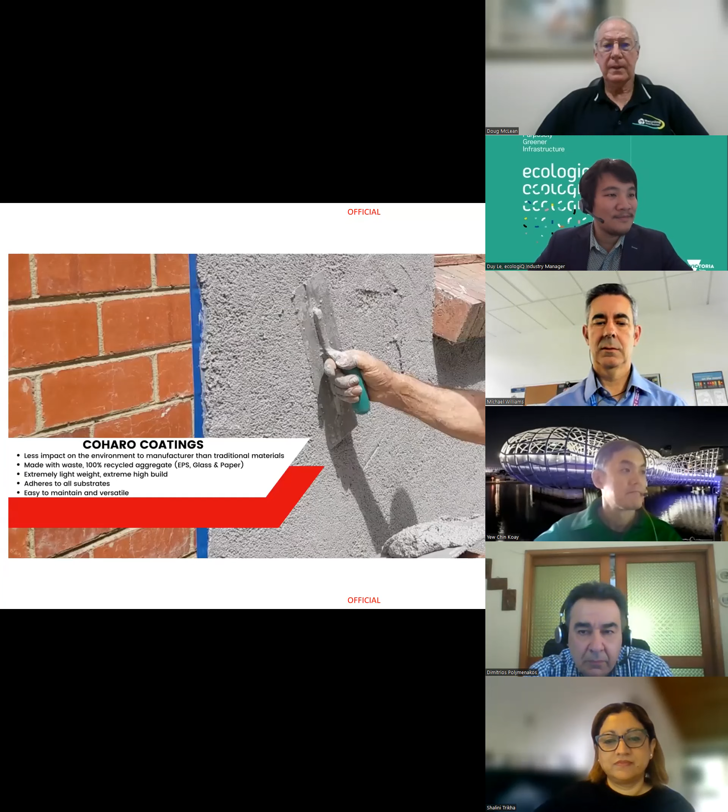And options like Coharo, a business that provides a 100% waste-derived leveling coat, which can help smooth out shotcrete, fill gaps and cracks inside masonry bricks. It's made from polystyrene, glass, and paper. It meets Australian building standards, and the same material is used to make a masonry block alternative.

Sometimes the most simple innovations are best. DuraPanel Ortec makes compressed straw panels for soundproofing in sports stadiums and music stadiums. It's being used at sound studios at the Docklands, and it's been used at the Sydney Olympic Games. This is a great product that's available, also made right here in Victoria.

Last but not least, last month we had this great new innovation - carbon black recovered through end-of-life tires. This is a lime replacement in asphalt. They believe it will improve performance, extend the life, and act like a sunscreen for the roads. As part of the manufacturing, they also produce a tire-derived fuel oil, which is a diesel replacement. This is a Queensland company looking to set up shop here in Victoria, and we'll be looking for sites to trial this on Victorian roads.

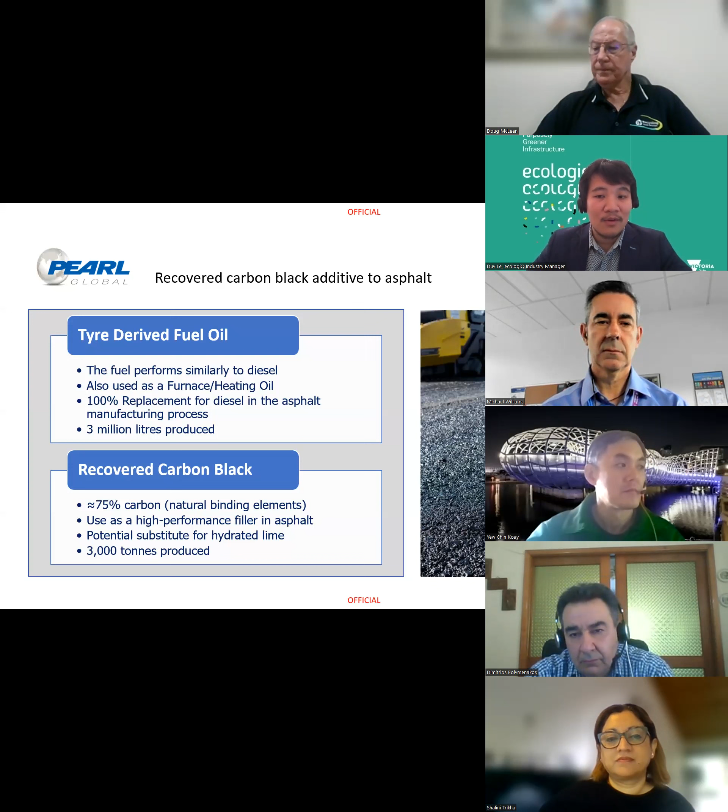But we're here today to talk about what's possible in concrete with recycled materials. I've got a couple of slides lifted from our visual guides, which if you haven't seen before, you should jump onto the ecologiQ Knowledge Hub and look them up. We know that when it comes to structural concrete, you can use supplementary cementitious materials in your concrete.

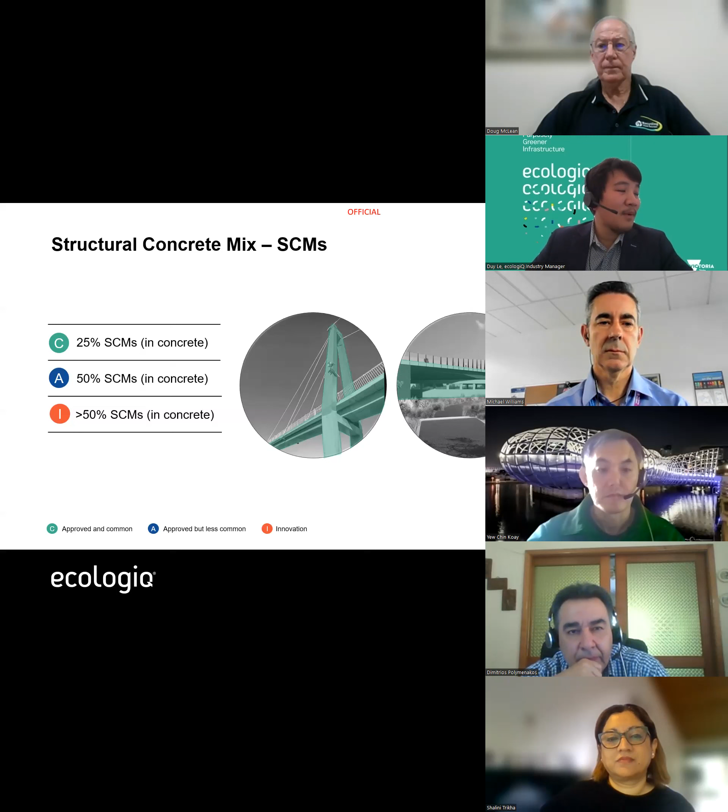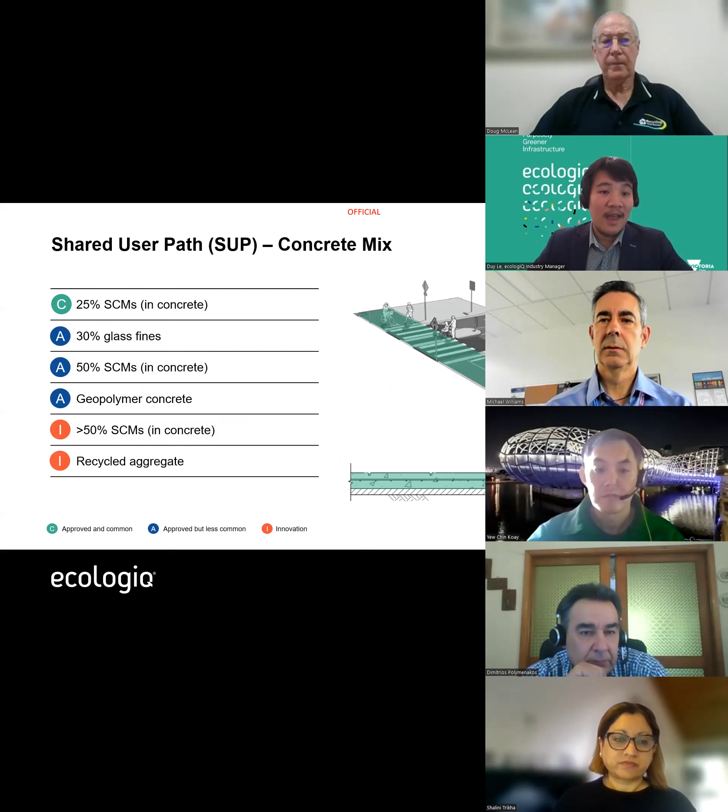But we know we can also push the boundaries around that, going beyond 50%. We know that in non-structural applications like shared user paths, you can start using these SCMs, but you've also got options around geopolymer. As we go through today, we'll look at what kind of different aggregates might be possible in terms of the innovative front.

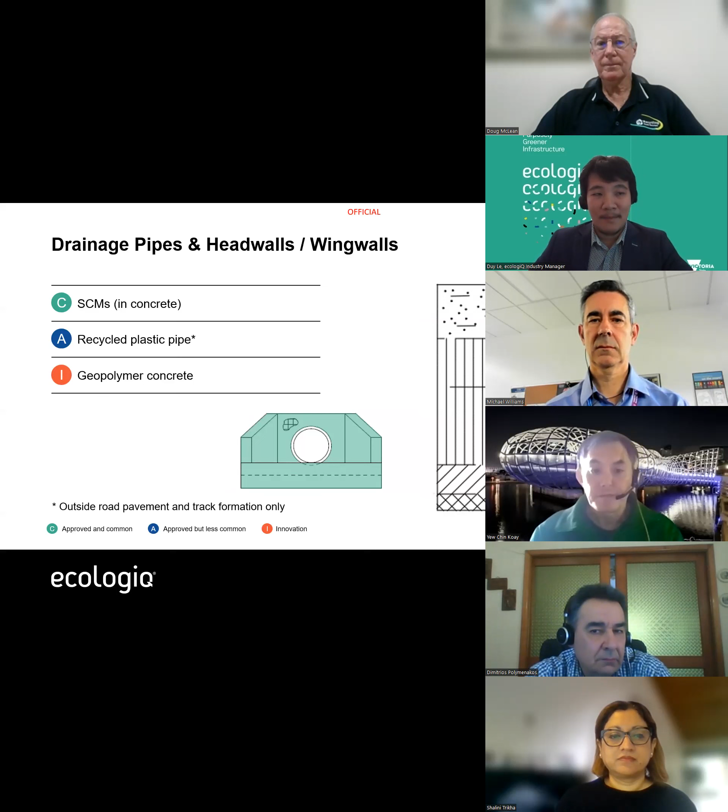You can use things like plastic fiber replacing steel. You can use crushed brick and rock, and it can go into other applications like medians and curbs, as well as drainage pits and lids, which you'll see today. And head walls and wing walls, again with geopolymer concrete right through to plastic applications. So you'll see a theme of today - there's going to be a lot of talk about the alternative aggregates that can go into these sorts of structures.

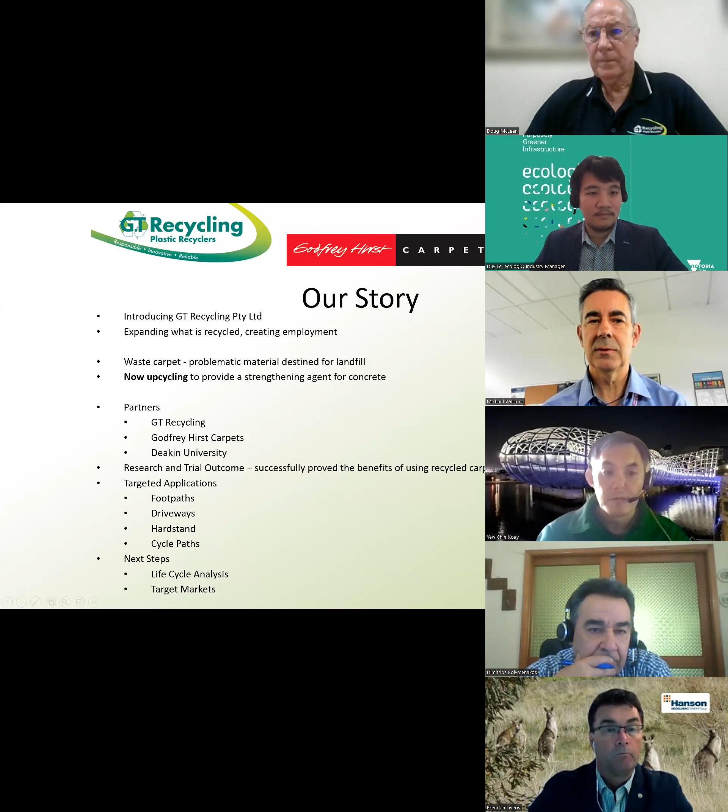The fibre product we're talking about today is the result of a three-way collaboration. Godfrey Hirst is a well-known carpet manufacturer, actually the largest designer, manufacturer and exporter of carpets in Australia. In 2017, they had a turnover of about $430 million.

The company is now owned by Mohawk Industries in the USA, but continues to run very efficiently and happily in Geelong and other sites in Victoria. Our other partner, Deakin University, is world-renowned for their expertise in fibre technology, especially located in their Institute for Frontier Materials at Waurn Ponds and in the School of Engineering.

So on the next slide, I'll pass to Doug for a bit of an overview and some background on GT Recycling.

Thanks, Mike. I'll take the opportunity to give you a brief snapshot of what our company GT Recycling is all about, and a little bit of the evolution of this particular project and the resultant product. GT Recycling is a plastic recycler, mainly concentrating in polyolefins, based in Geelong.

The business has been operating for about 20 odd years, and it's not so much in the collection and recycling of curbside post-consumer waste. It's more in the area of industrial and commercial, and we do a lot of work recovering waste plastic from councils, from tips, and also collection points that councils have around the state.

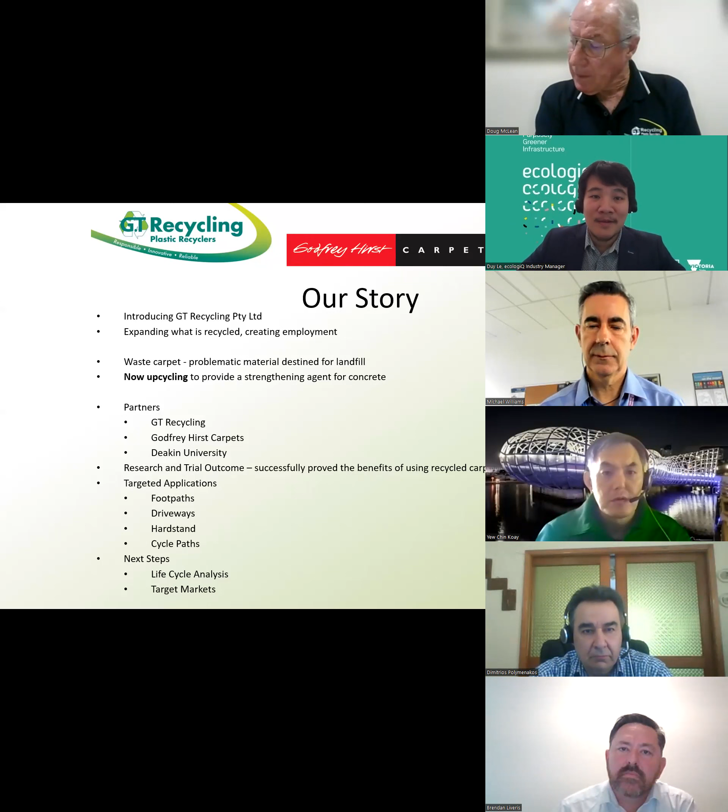So okay, well I'll pass it over to Mike. I think that's enough, and Mike will give you a bit of technical detail on the product and a few more details.

They're not obvious, but they do have obvious characteristics. And the whole point is that concreters want a concrete that is still workable, and still going to provide the surface finish that they're after.

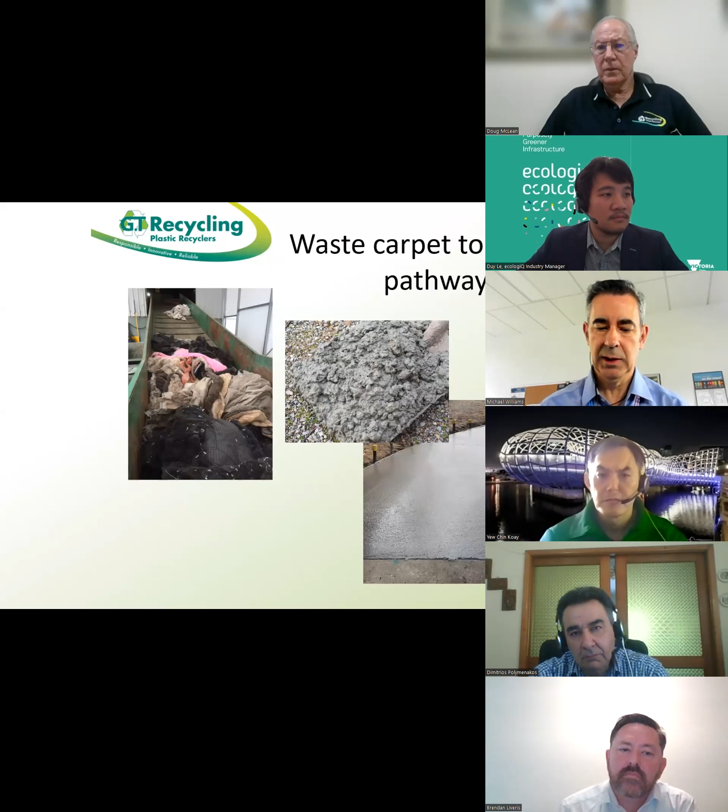So these are two key areas that we've actually been very successful in. We're expecting that in terms of capacity, there's about at least 150 tonnes of this carpet waste per year as potential to be used.

So in lab testing with Deakin across a number of years, you can see the example of a standard concrete sample block without the fibres, and then the same stresses applied to a sample with the fibrecrete included. There is a significant advantage to the product in preventing cracking at the start, but also reducing the propagation of cracks within concrete over time.

We've complied with all of these different standards, both American and Australian, referenced by Deakin as they tested and formulated the exact benefit mix of fibres that we need. It's mentioned there that we've reached compressive strength of 25 megapascals, and actually on the most recent trial site at Godfrey Hirst, we were certified to 32 megapascals. So it's certainly been proven recently to be up to industry standards.

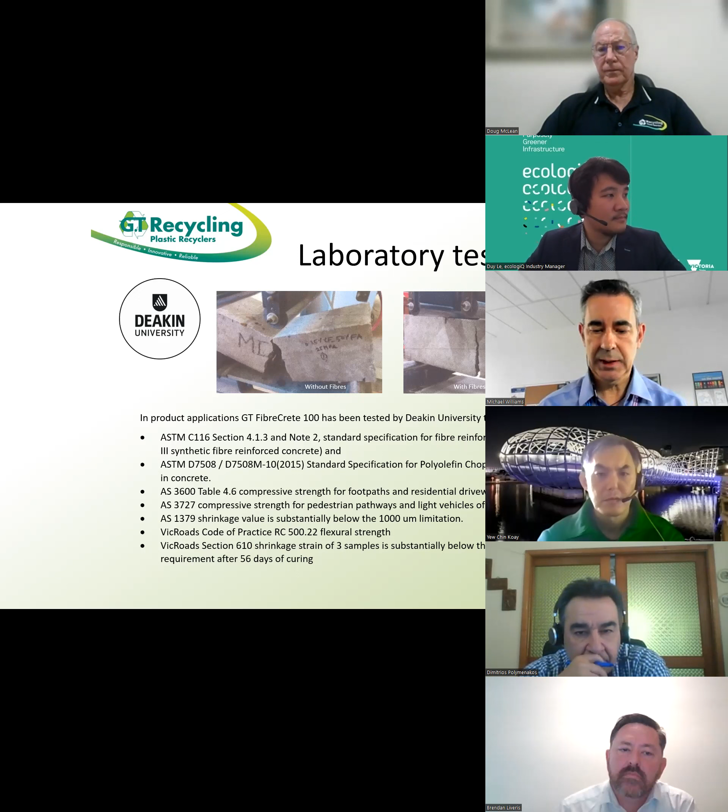So just to quickly work through the product life cycle summary: at the start, we use minimal energy to process the carpet offcuts into the fibres. The concrete projects can specify the GT Fibrecrete 100 for added durability. Through production, there's no additional energy use over regular concrete, and no additional processes. Through distribution, we're using standard concrete trucks to mix and deliver the concrete to site.

Importantly, for usage and repair, our concreters have reported that it was no trouble for them to work with this product added into concrete. And over time, it's proven to be more durable and require less repair.

At GT Recycling site in Moolap, there's been a slab laid for a number of years, and it's very obvious to see this slab next to another slab that's run over by forklifts every day. The fibre reinforced concrete is obviously very much together, with no cracks like the regular piece of concrete beside it. And once concrete is decommissioned, it can be further recycled - we're happy to suggest, at this stage it's only a suggestion, that perhaps it could be used as aggregate or road base.

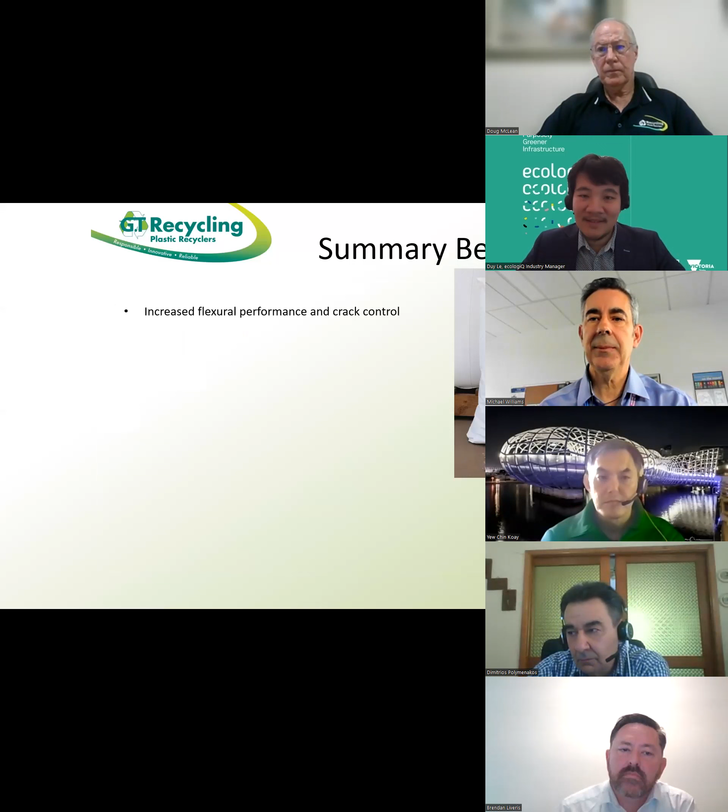Once again, increased performance and crack control. We've reduced drying shrinkage as well with this product, with all the workability and advantages of that, and it's very cost effective compared to virgin plastic fibres. This is a very high value, low cost but high value product.

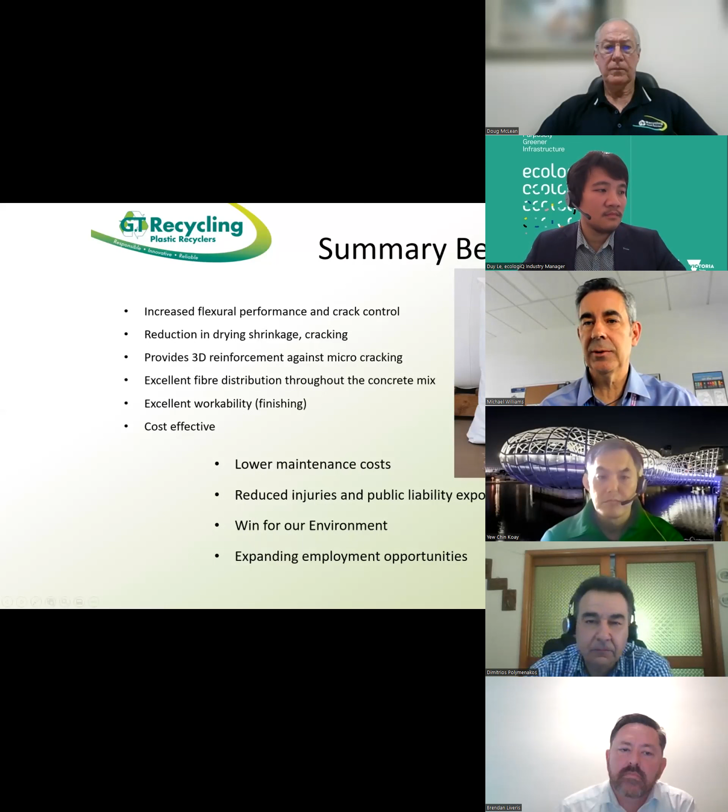And we were expecting that it would result in reduced injuries and public liability exposure for LGAs. It's a win for the environment, and it's expanding employment opportunities with a new product.

Next steps, we're looking at a full life cycle analysis, which we'll kick off in the new year. We're working on finalising the packaging, marketing, and gaining market acceptance through LGAs around our area. We would like assistance from anyone at ecologiQ or on the call with additional trial sites, and particularly to work with a concrete supplier that has operations in Geelong as a partner.

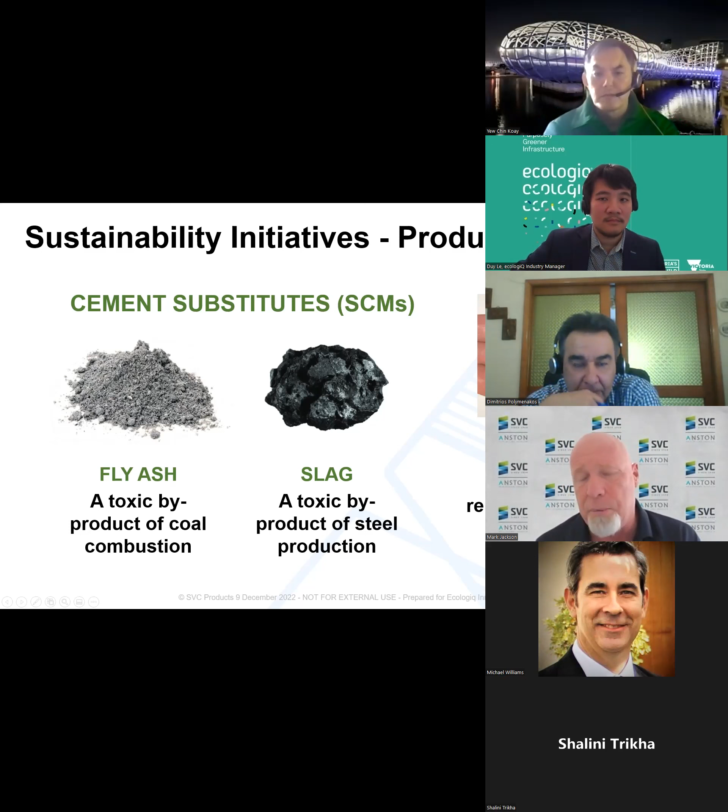We still use conventional steel reinforcement, but we've started adding recycled e-mesh and recycled plastic macro-synthetic fibre. We've found this improves early stripping or demolding of product, and has assisted with handling of the green product, reducing cracking and spalling. Talking to the boys in production this week, our current mix design has basically eliminated all cracking and spalling. We still lose a few products to human error - that's to be expected, I guess. But an unintended consequence of developing this new eco blend of concrete is that we're actually making better and stronger products.

When we talk about the ready mix or pre-mixed concrete we buy in, we're currently sourcing that from Holcim, and that goes into all our precast pit production - the Vic Roads custom pits, DOT custom pits, subdivision pits, and our commercial knockout range. We use three different types of ready mix from Holcim at the moment: EcoPact, Ultraflow, and Agilia. You can look that up on their website, but they're basically all concretes with varying levels of SCMs involved.

Currently all our small elements for municipal and other areas are made with our eco concrete. We're getting great results - we've reduced a lot of the chipping and spalling that were sometimes common, especially in colder weather, which is difficult for any precasters making stuff in Melbourne in the middle of winter. That's where we have our challenges.

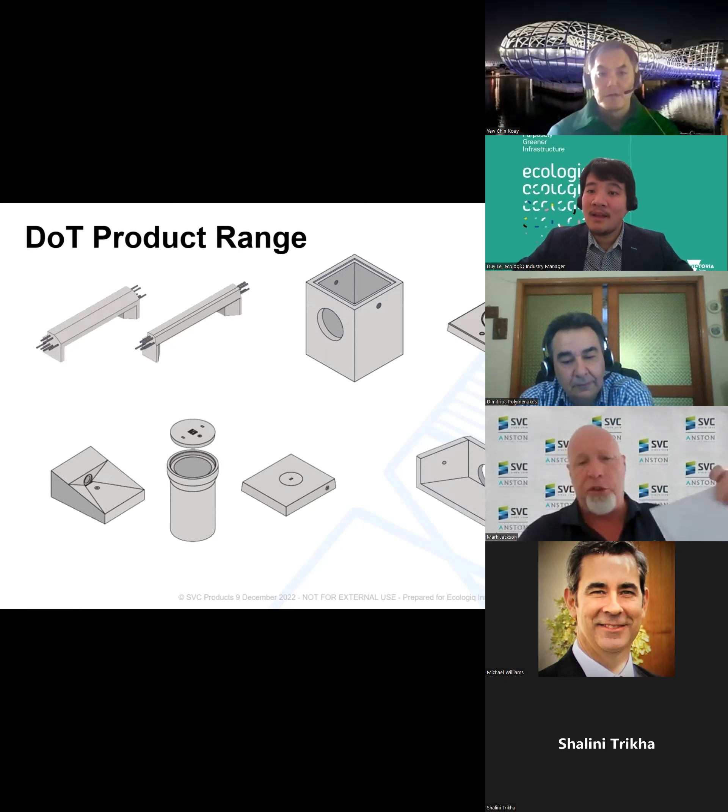I'm moving through this very quickly - I'm very pleased with this. If we move on to the next slide, please.

Great, I see you've got about 3 minutes, Mark. Yeah, no, this is the last one I want to speak about, so that's fine.

Traditionally, through the specifications of the Department of Transport, or Vic Roads as it was in the early days, we've been involved with the Department of Transport going back to the days of the CRB, the Country Roads Board, the Road Construction Authority, Vic Roads. In 1992, the standards changed and the concrete covers changed for all pits in the stormwater for Vic Roads, and that was a concrete cover with a circular insert. The problem was it was always a very heavy product for the insert for maintenance crews.

In the last couple of years, we've seen a transition over to lightweight load class C, SMC lightweight plastic products. Unfortunately, these particular products are a fully imported product - there is no Australian content whatsoever in these products.

So what we've developed now is a SVC Eco Concrete frame. This has been worked very diligently over the last 12 months to produce a product now that is a concrete section 125mm thick, that is load class C, so that's 150 kilonewton. And we've included an SMC insert. Now, the SMC insert is the lightest available for maintenance crews - this is 1/3 the weight of the traditional concrete cover, and about 2/3 the weight of the current offerings of the load class C fully imported products.

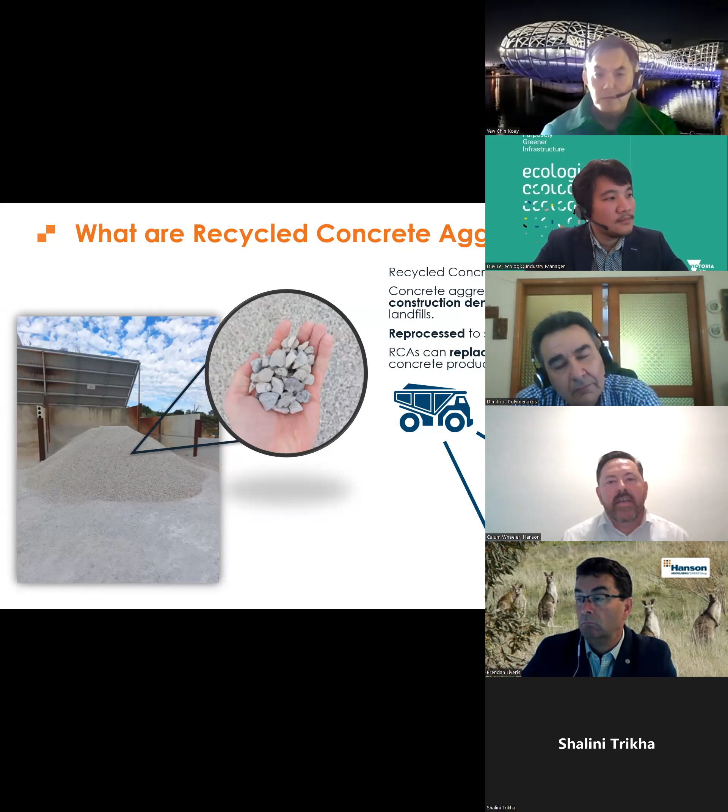Looking at the RCA properties: just like traditional virgin materials, the product's available in a 20 mil and 14 mil graded aggregate. Unlike traditional aggregates, the water absorption is quite a bit higher, sitting at around 5.5 to 6%. The shape of the material itself is comparable to virgin materials, and it's able to meet the minimum requirements for AS 2758. That's the raw material.

What about when we put it into the ready mixed concrete itself? What we found when we started doing the trials is that it can shorten its open life or its plastic properties. At heightened replacement levels, it will lower the bleed properties of the mixers, and also likely increase the variability of strength results. Also at higher replacement levels, we saw an impact on shrinkage results and ultimately some reductions in compressive strengths by pushing those replacement levels so high.

What we found is that we recommend it is a usable product, but it does have some limitations. We think it should be around the 32 MPa and below. There's plenty of applications this product can be used in. When we've taken it out to the field, we've looked at replacement levels between 10 and 100% of the coarse aggregates, and what we've found is the optimal replacement levels sit between around 30 and 50%, to mitigate or eliminate additional cement offsets. That's why we've come up with those.

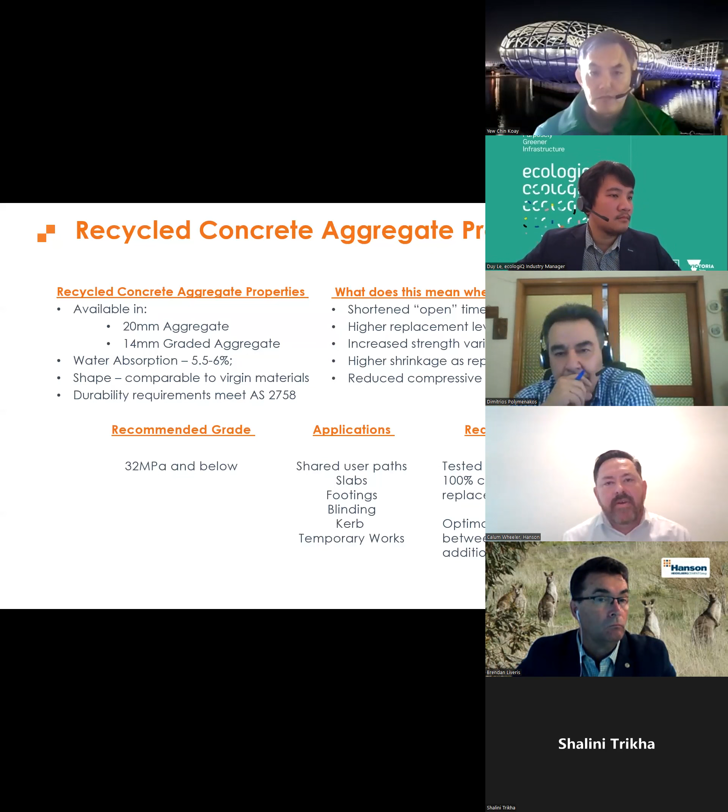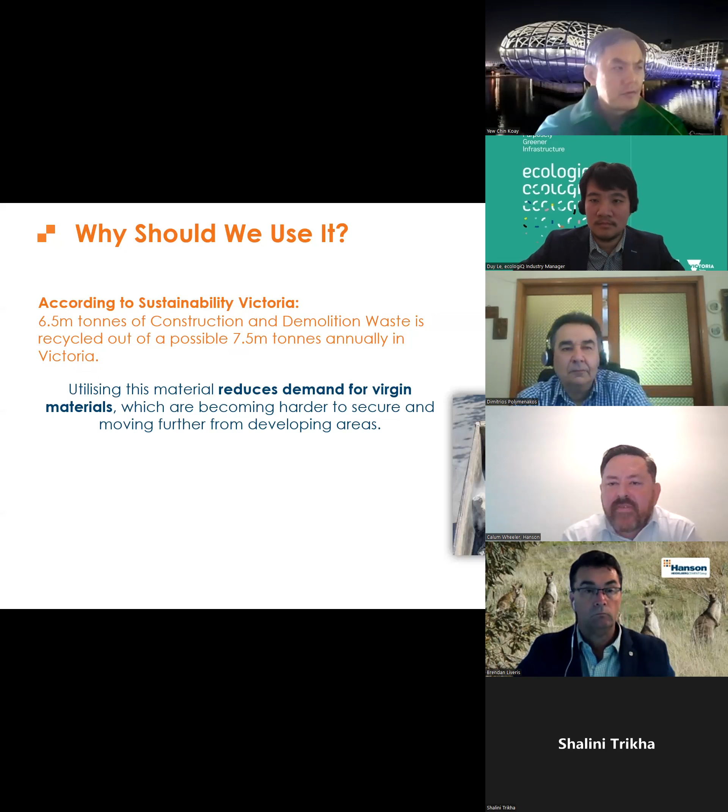So why should we use RCA in concrete production? According to Sustainability Victoria, we've got availability of 6.5 million tonnes of construction and demolition waste within the Victorian market out of a possible 7.5 million tonnes annually available to us. By utilising this material, we're reducing our demand on virgin materials. These virgin reserves are depleting, becoming harder to secure, and moving further from the developing areas. Each year we utilise large volumes of virgin materials, and to replace them we have to move out further and further from the developing markets.

So where should we use this? Of the estimated 50 million tonnes of quarry products used each year throughout Melbourne, we only have access to about 5 million tonnes. So whilst there may be 7.5 million tonnes of demolition available to us, by the time we reprocess and clean up the material, that equates to about 5 million tonnes, roughly 10%. So recycled concrete aggregate is not a replacement, it's a supporting function. We need to target its use to ensure we're using it in the most sustainable manner. Currently we utilise crushed concrete mainly in road base, fills and under slabs. By progressing it into a recycled concrete aggregate for concrete production, we're looking at expanding its usage into foot paths, curbs, footings, blindings, temporary works, those types of applications.

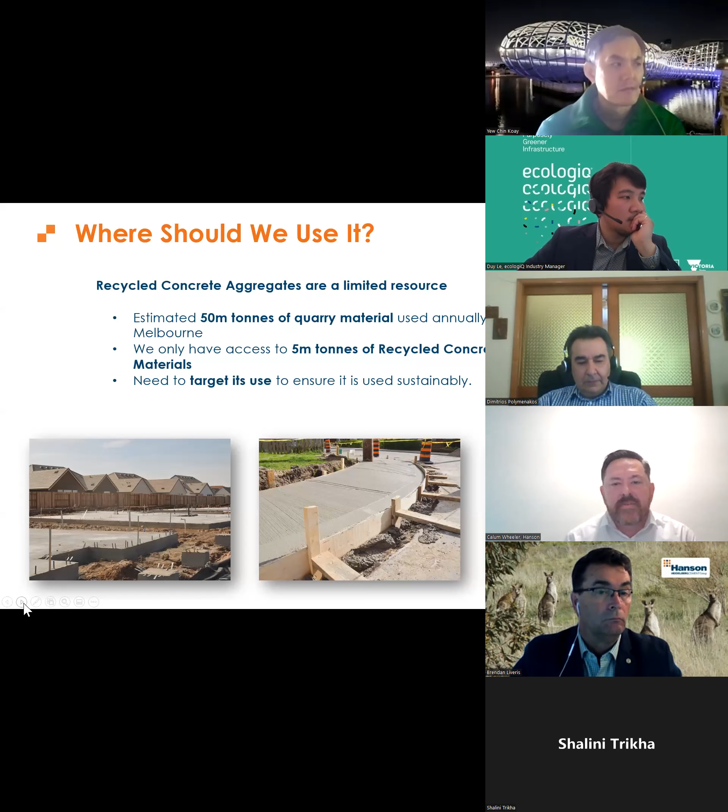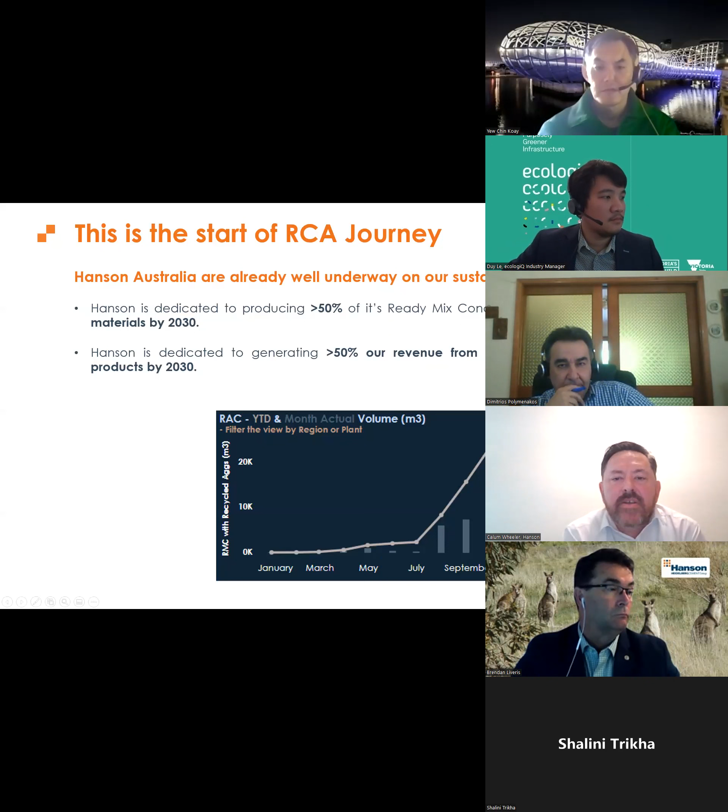While the RCA journey may just be beginning, Hanson Australia is well underway on our sustainability journey. We're dedicated to producing at least 50% of our ready-mix products portfolio using a minimum 30% circular materials, which this falls into. We're also dedicated to transforming our portfolio so that we're generating at least 50% of our revenue through low carbon and circular products by 2030 as well. You can see by the graph there, the uptake and usage of these types of products is significantly increasing month on month.

And finally, so in summary, RCAs are a really valuable addition to virgin coarse aggregates, not a replacement, an addition. RCAs are a limited resource with limited availability in the Melbourne market, so we need to be selective about how we use this product to ensure we're using it in the most sustainable manner. The use of RCA aids in creating that circular economy we're striving towards and minimises waste. Hanson is dedicated to producing over 50% of its ready-mix concrete using a minimum of 30% circular materials, such as this, by 2030.

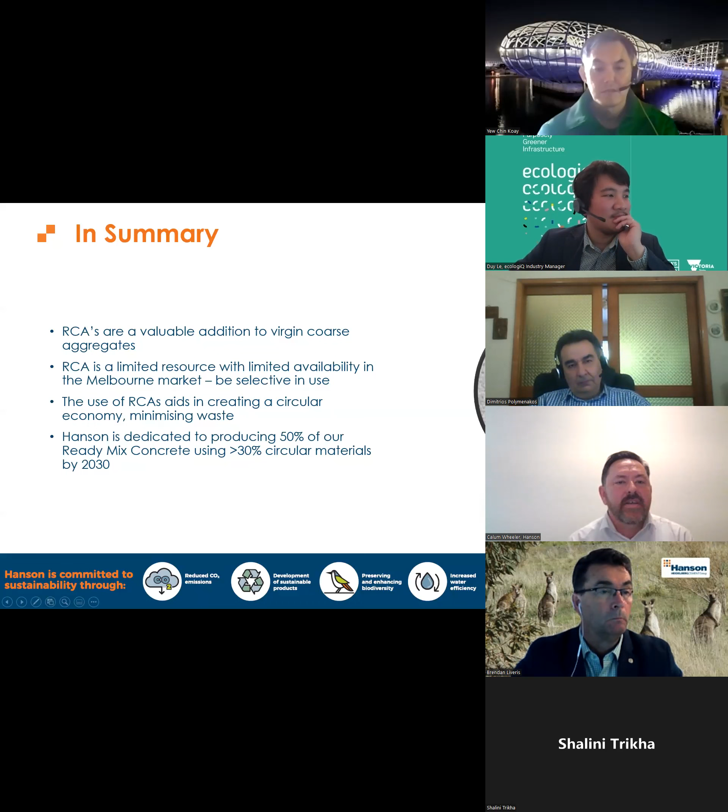So I know that was a very high-level presentation on RCAs, but hopefully that has given you an oversight of recycled concrete aggregates in the production of ready-mix concrete. Thank you.

Thanks, Calum, for your presentation. Very interesting, I always favor recycle, reuse in infrastructure. The question for you: for this reconstruction material, how do you control the quality?

Yes, so we apply specifications. We're fortunate that VicRoads have set out some specifications around grading specifications, contaminant content measurements. We utilise on-site laboratories within our production facilities to carry out production-based testing on the raw materials that come in, and on the production of those products, very similarly to the production quality assurance programs applied to virgin materials.

Yeah, I understand that a number of the requirements cannot be met. For example, like VPV, normally recycled material, the VPV is higher than required in the virgin specification, like tensile strength and chemical content. How do you overcome this type of thing?

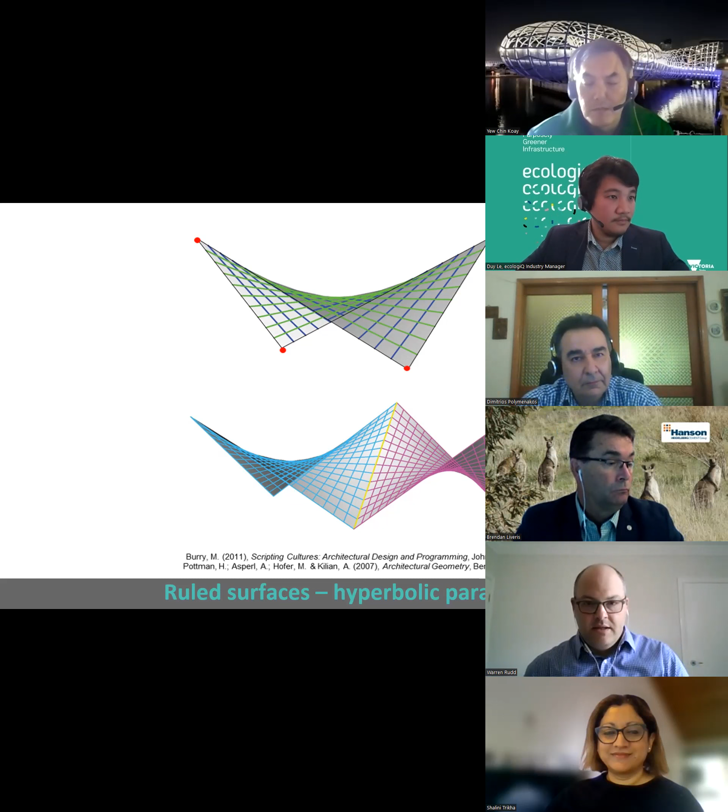So this was just a slide. This type of geometry isn't new. It has been used before successfully in architectural projects. It was very popular with architects like Felix Candela and Antoni Gaudi.

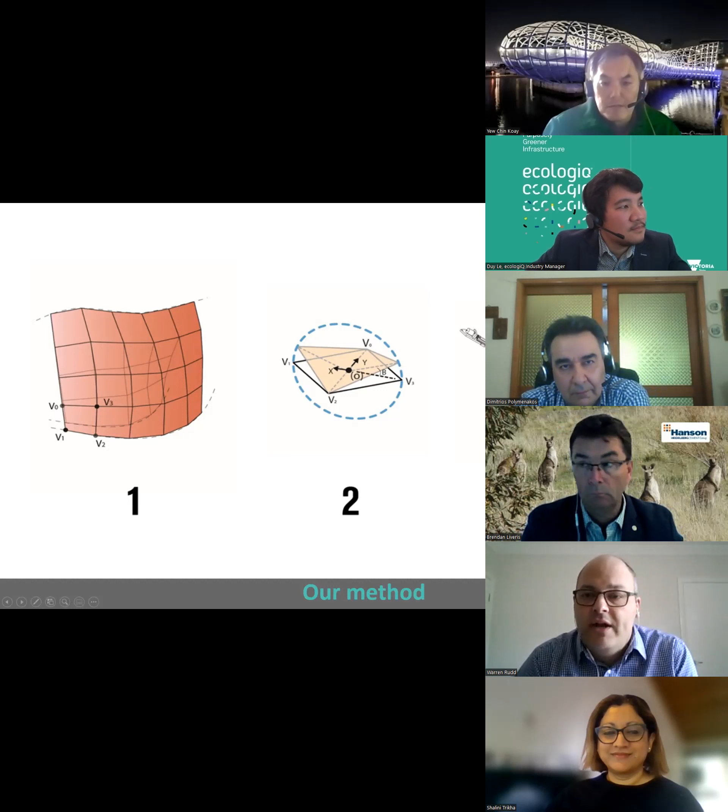And how this, in practice, how this really works with us is we've developed a technology that can take a curved design or a free-form design, and it panelizes it or divides it up into a series of panels. The technology then extracts the geometric coordinates of each of those panels, and it feeds it into our mold. We then cast that panel. Once it's cured, we demould it, take it off the panel, and then we repeat that process without creating any formwork waste.

So that's kind of, that was really around the formwork, and then just talking about our low carbon concrete alternative. What we use is a geopolymer. We've created our panels using a geopolymer. We have developed it in-house. We do not use any Portland cement in our mix. It's fly ash and slag, and then we use an alkali activator. And that really gives us properties that are pretty similar to traditional Portland cement for the applications that we're looking at. But the real benefit is it's up to an 80% reduction in CO2. We're using it, and it has a positive waste footprint.

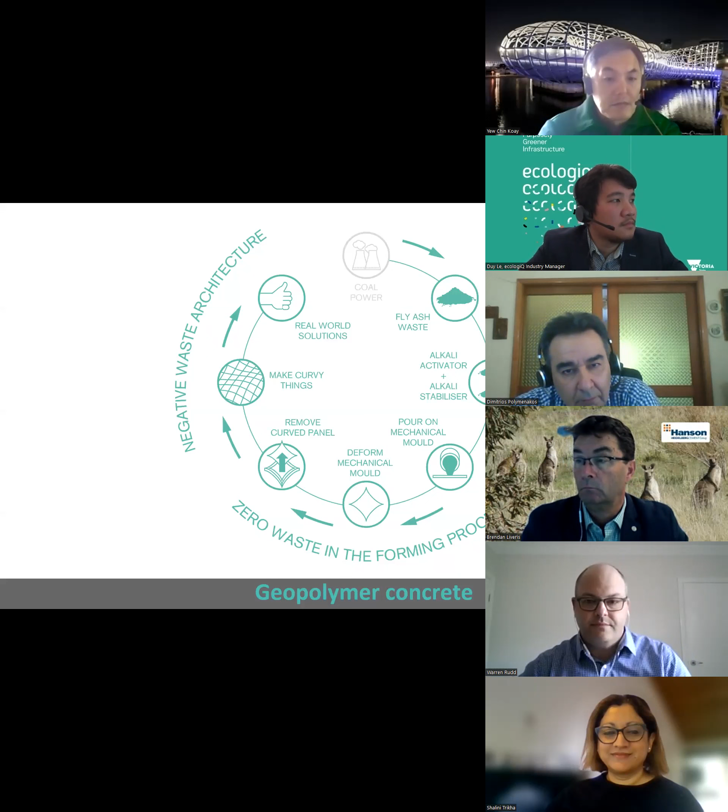In terms of some of the challenges that we faced, particularly around design, there are lots of interrelationships between the various stakeholders, which I'm sure everyone on this call will be familiar with. Typically what happens for us is a property developer will come up with an idea and they want to build something that's pretty unique. And they'll then engage an architect who tries to capture that original design intent.

But from then on, it gets a little bit trickier because each of the subsequent stakeholders try to value manage that project based on their own priorities. So the engineers are very, and rightly, focused on risk. The builders are looking at cost and buildability, and the precasters are looking at the capabilities of manufacturing these very bespoke panels.

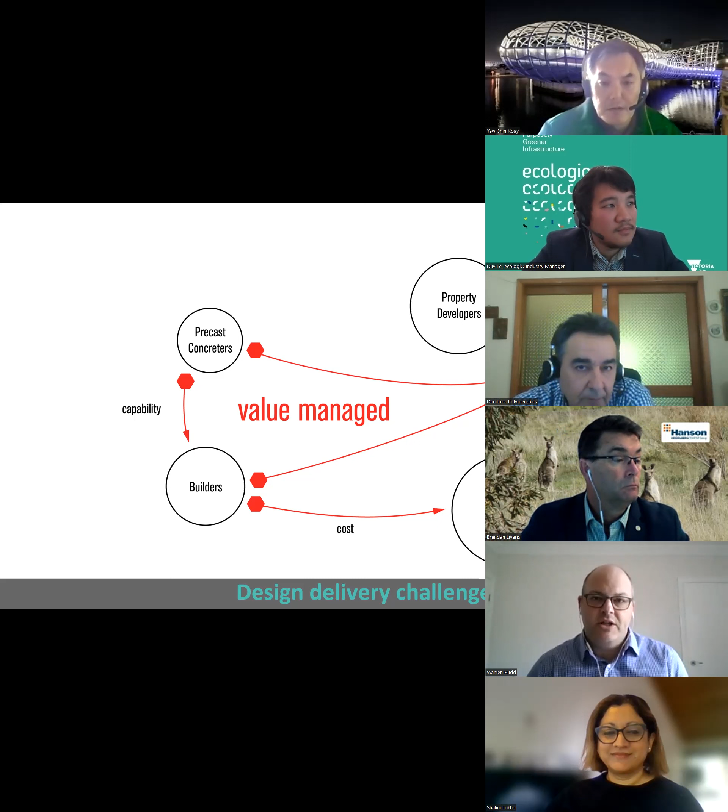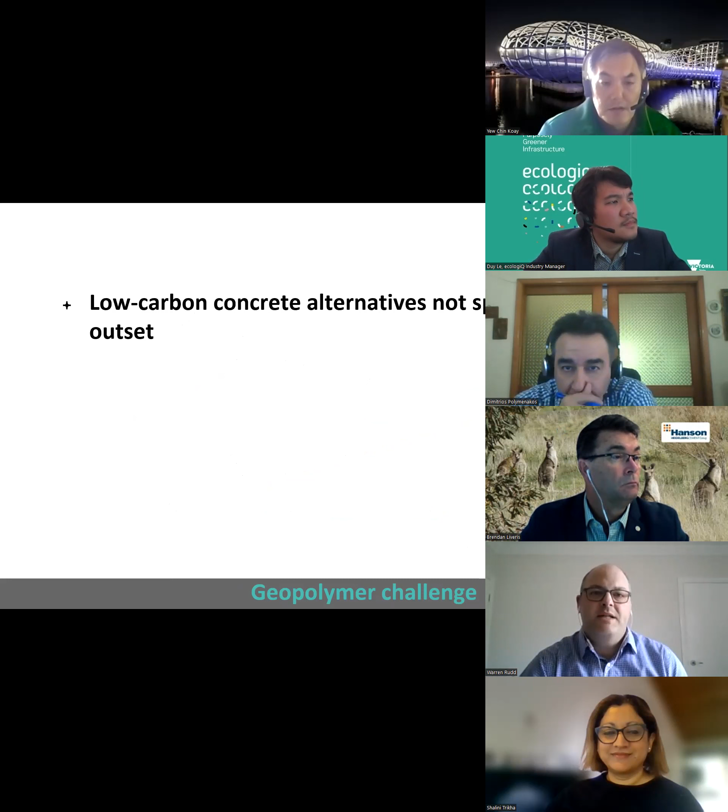And then in terms of the geopolymer mix challenges, these are some of the common themes that we've encountered. First up, concrete alternatives not being specified within project documentation from the outset. When we start talking to people later on, once the project started rolling, it's very difficult to then impact that material usage. Another one is there is a lack of industry experience using high content geopolymers. The industry tends to want to stick with what it knows and is comfortable with what it's used in previous projects.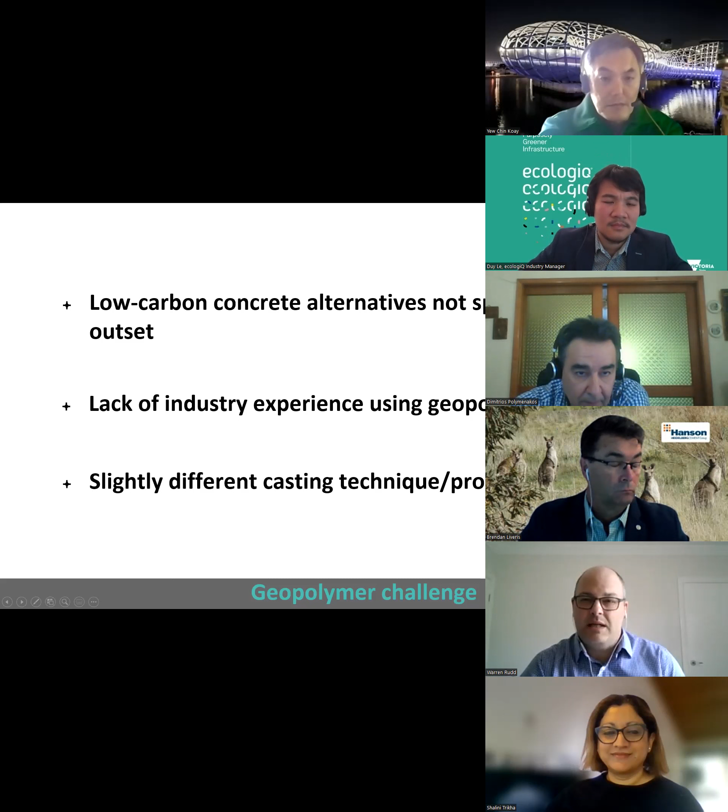And then the third one is, there are some slight nuances to using geopolymers. So there might be a slight change, people might not be 100% used to working with alkali activators, for example, or there are some slight differences in the curing or casting processes. But the good news is that it's totally achievable.

So we've actually just completed our first demonstrator project, and that is about a 35 panel curved staircase and emergency exit tower that is on a 15-story apartment building in the Melbourne CBD. It starts off on level 14, goes through the roof slab, and finishes on level 15. Each of those panels are individually curved concrete panels that we made using one of our molds, so we generated no formwork waste, and each of those panels is a geopolymer panel.

Some of the highlights from this project were, we achieved a pretty intricate design. When we first tabled it, people were kind of scratching their heads to work out how it was actually possible, but we achieved it - a pretty intricate design.

We eliminated all the formwork waste, 100% reduction in the formwork waste in the casting process. We achieved an 80% reduction in the CO2 emissions using our geopolymer mix compared to a standard Portland cement mix. We were able to achieve a 13% reduction in the steel usage - you can see those ribs, we were part of the design. We achieved a non-combustibility certification on the panels, and we achieved an engineering compliance and sign-off.

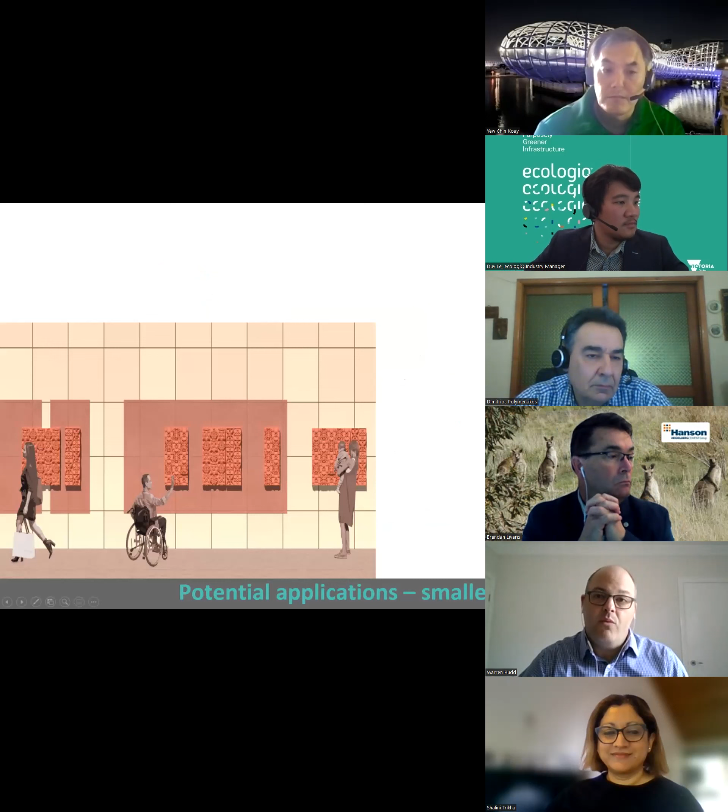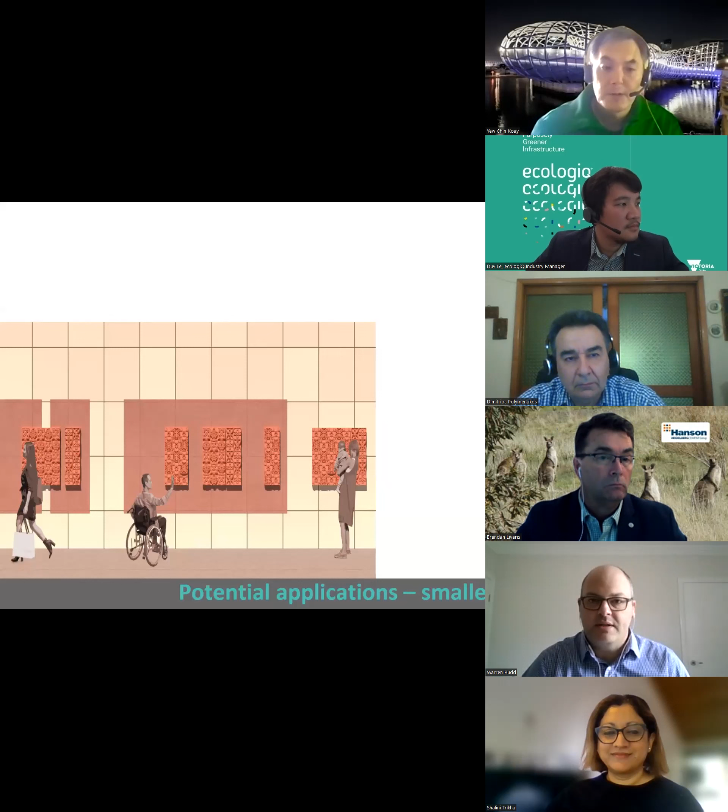We think there's a number of applications for this type of technology. On the smaller scale, it can be used for things like public installations, sculptural elements, and landscape design. That's all on the smaller scale.

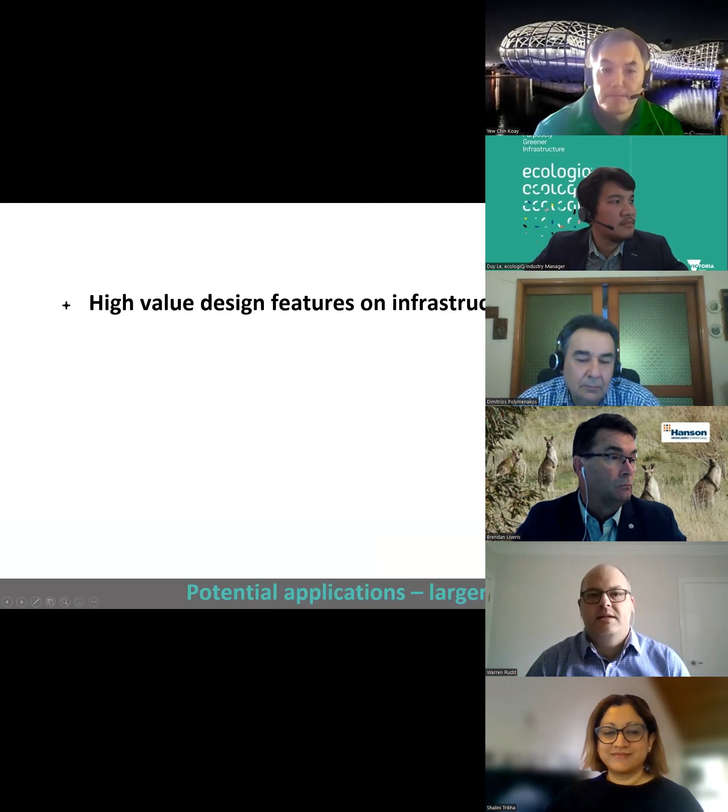But on the much larger scale, which is where we're very excited and think our technology can have a much bigger impact, is on high value design features on infrastructure projects - things like cladding on train stations, bridges, substations, etc., shade structures for public areas, and noise barriers.

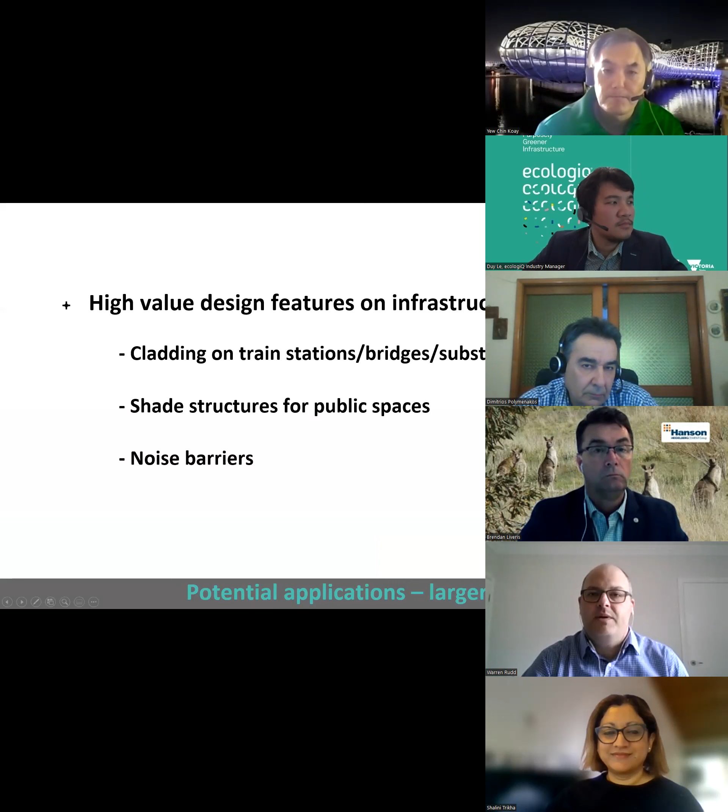The final thing we're looking for is opportunities to trial our panels on your projects. We would love to be involved as early on as possible, especially around the design phase, because there's a lot of value we can bring around the shaping of our panels and some of the benefits that could help.

We're looking to work with companies that are supportive of using low carbon concrete alternatives like geopolymers. And we're happy to work with you on smaller scale projects first, if that's a quicker pathway for us to start a relationship with yourselves. Yeah, that's it. Thank you.

Thank you, Warren. Let's open it up. Perhaps Shalini, did you want to kick off? Yeah, thanks, Warren, really good presentation.

Just wondering, have you done any LCAs? Have any LCAs or anything of the likes been conducted for this technology? Sorry, you broke up there, what was that? Any LCAs? LCAs, as in life cycle analysis?

Ah, sorry, yeah, so we have - I don't have it with me, but unfortunately Daniel, who's a technical co-founder, wasn't able to join the call. Look, it's very similar to traditional Portland cement applications, and there's no reason why we can't hit 50 years or even higher. So just to point out, what we've started with here is non-structural, and that's really how we think we can get into the market and start getting our panels used, but the technology is totally applicable to structural as well.

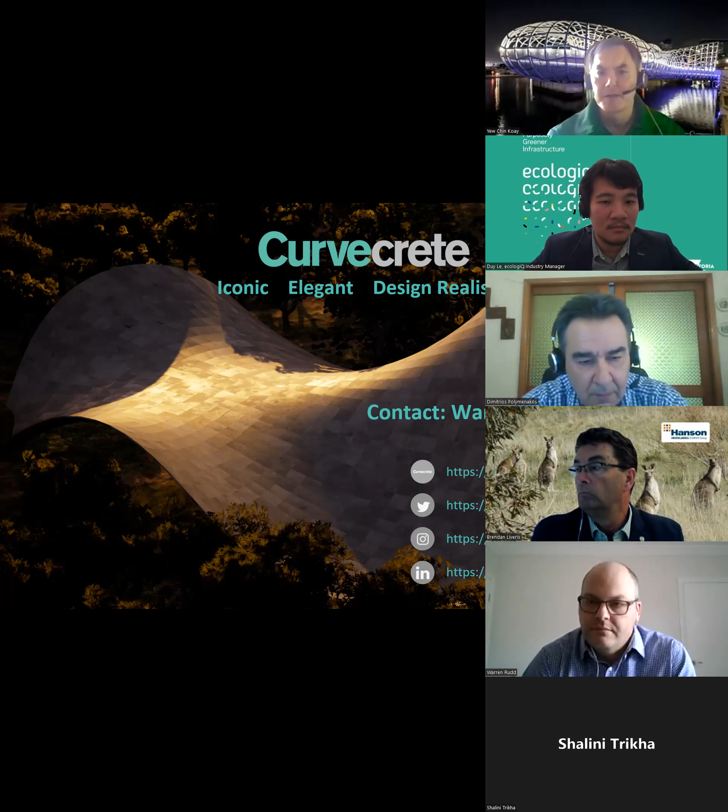For this one, the curvature always comes down to structural optimization, so you need a very complex structural analysis. I can see architects always like this type of architectural work, but when it comes to the engineering it's always complex because you need to do the complex structural analysis and make sure everything is formed up in the right structure.

And the other thing is, in terms of the opportunity you touched on using this in noise wall bridges and this type of thing - how do you see, or have your team or colleagues considered, how this would meet the requirements in the infrastructure design requirement?

So I think I know what you're asking, but let me know if I'm wrong. From a noise wall perspective, we actually see it more as a structural application, and we are experimenting with a whole lot of things around post-tension cabling systems, where they can stack up a lot, self-supporting, and stack up against each other and on top of each other. Is that kind of what you're asking?

Yeah, maybe this one we can take offline and discuss further, because what I see is more on the integral structure - in terms of the integral structure, how are you going to meet the design requirement? This is the thing I'm more interested to know.